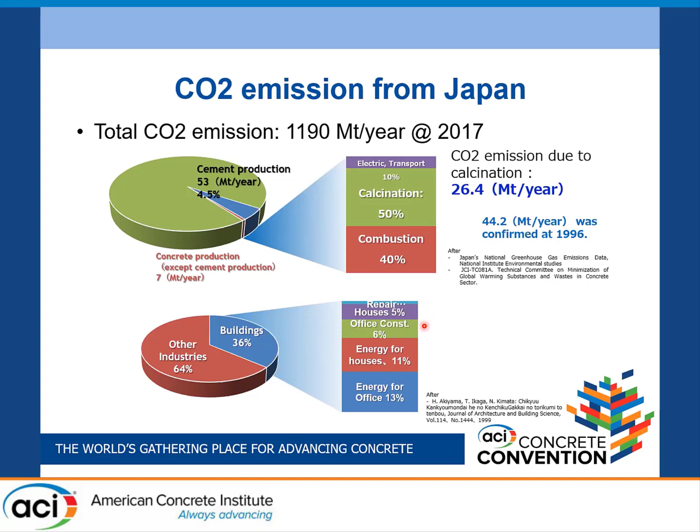And industries relating the buildings produced about 36% of the total CO2. And this is the detail of this number. And the 11% of the total CO2 came from the construction process. So as it is generally recognized that the running energy has a large impact on CO2 emission rather than the construction process, but still this number cannot be ignored. So we have to think about the CO2 reduction in a construction process.

With regard to environmental load, 1,590 megaton per year was consumed in 2017, and the construction sector consumed about 42% of the total resources. So when we look at the more detailed numbers shown here, we can see that the concrete sector consumed about 12% of the total resources, which is about 200 megaton per year, and this number is almost double of the steel consumption.

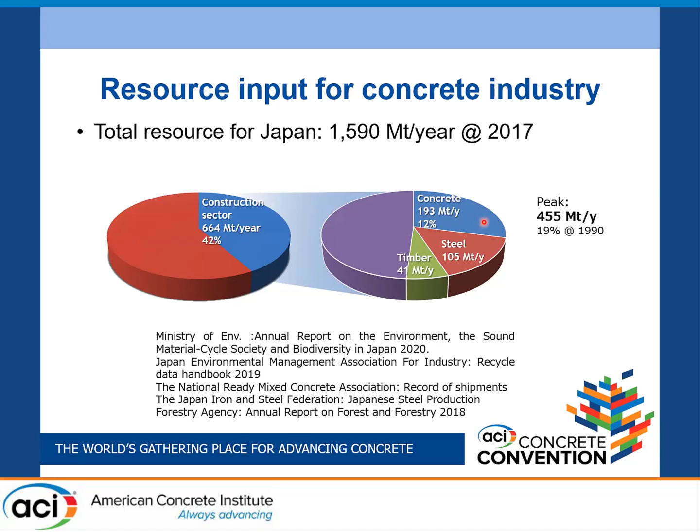So then, I would like to introduce the history of social consensus toward carbon neutral society in Japan. Architectural Institute of Japan and other four professional institutions published the Vision 2050: building related measures to counteract global warming towards carbon neutralization

in 2009. And in this vision, they decided to promote the minimization of CO2 from buildings during the next 10 to 20 years through the carbon neutralization of new construction, and promote the carbon neutralization of all building related sectors, including existing buildings, by the year 2050, and promote carbon neutralization of the surrounding city, region, and society.

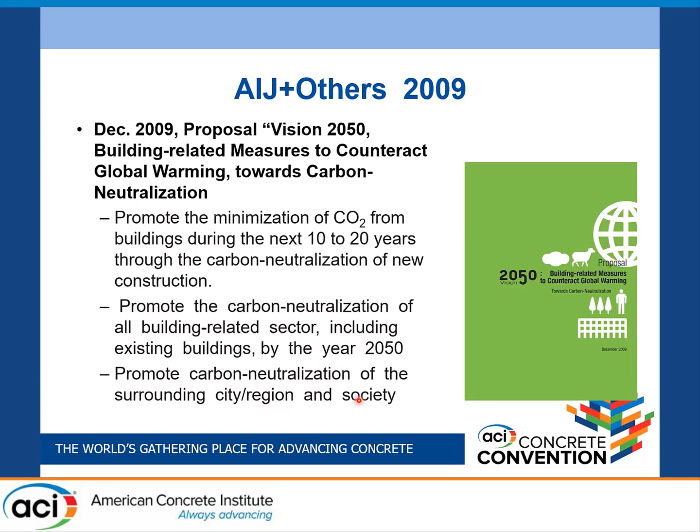And 1 year later, Japan Society of Civil Engineers published the urgent recommendations about the environmental issues. So they recommended 4 implementation measures. They are research and development to reduce CO2 emissions, and inducement measures to balance the environment and the economy. So reduction of CO2 emissions from national land planning and the transportation planning.

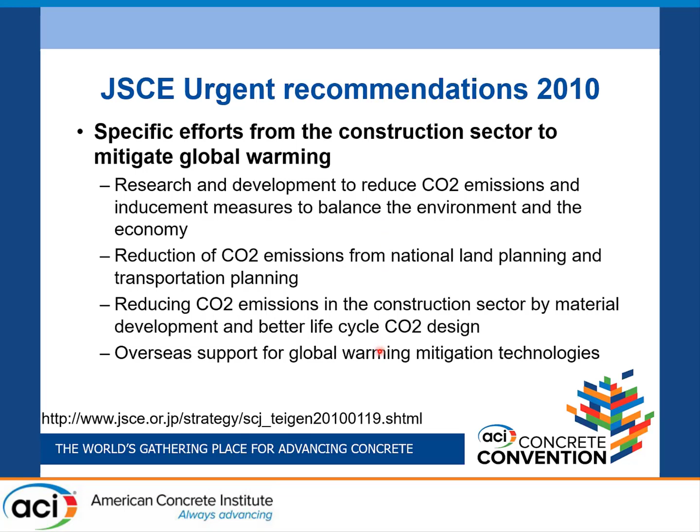Reducing CO2 emissions in the construction sector by material development and better life cycle CO2 design, and overseas support for global warming mitigation technologies.

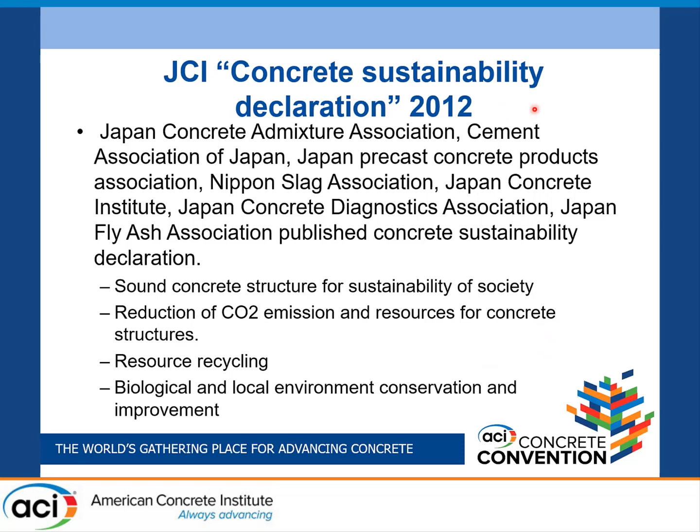Japan Concrete Institute and other concrete-related institutions published the Concrete Sustainability Declaration in 2012. In this declaration, 4 actions are proposed, and they declare to promote sound concrete structures for sustainability of society and the reduction of CO2 emission and resources for concrete structures, resource recycling, and biological and local environment conservation and improvement. It should be noted that this declaration is after the Fukushima Daiichi accident and the Tohoku large earthquake.

And for this background, we change our society bit by bit by applying laws and new systems. So I would like to introduce major decisions of our society. First one is the Low Carbon City Promotion Act, which was implemented in 2012. This law is designed to establish a recognition system for low carbon buildings that contribute to the reduction of CO2 in cities, and to give preferential treatment to buildings of high performance evaluation through incentives such as tax reductions.

So local government is required to make a low carbon city development plan, and the government gives financial support to the local government which aims for a compact energy efficient city. So for this law, a low carbon building certification system was developed.

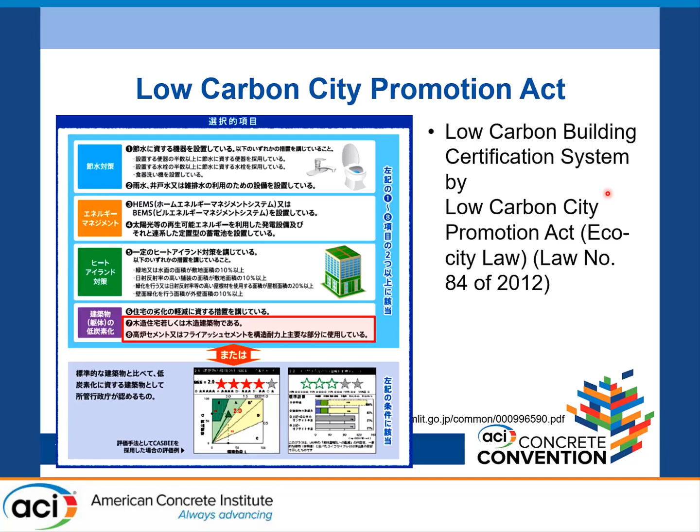Then afterwards, AIJ, the Architectural Institute of Japan, published the AIJ Action Proposal 2015. In this action proposal, from our construction material perspective, these are emphasized: circular use of resources, reduction of resource consumption, conversion to low LCCO2 materials, extending the life of material use and building life, and the utilization of natural materials.

In this carbon neutral roadmap, building carbon neutrality should be attained by 2030 for specific leading buildings. And this action proposal is trying to change all existing buildings into carbon neutral buildings by 2050.

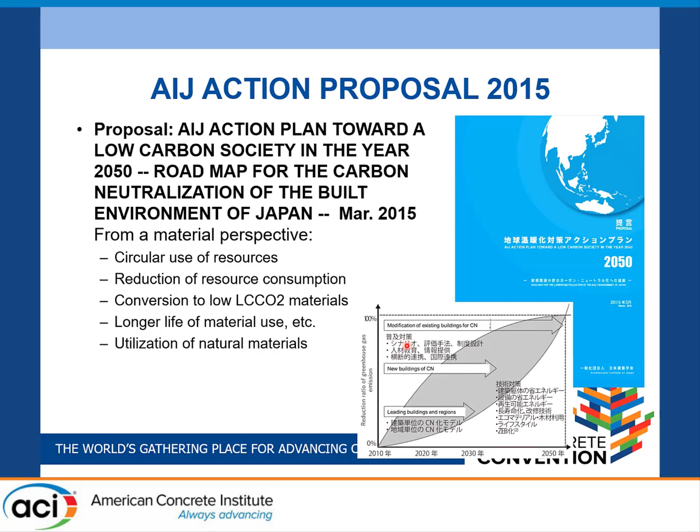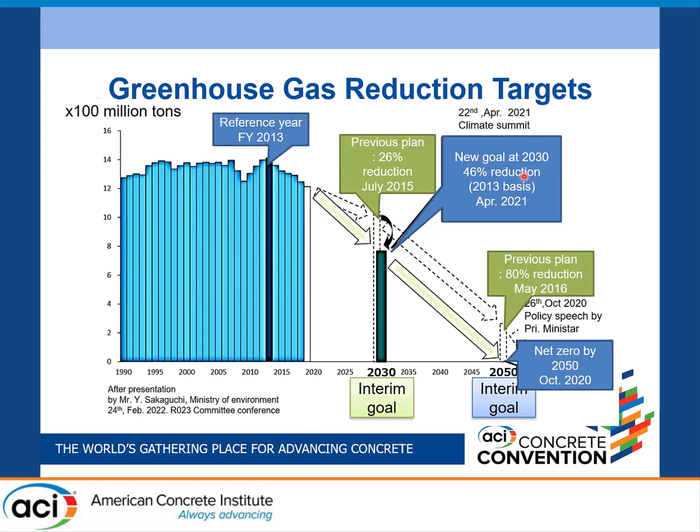This figure shows the historical changes of the greenhouse gas reduction target decided by our government. In general, as time goes on, the target becomes more challenging. Previously, in 2016, an 80% reduction of CO2 by 2050 from a reference year of 2013 was set. Then net zero was decided in October 2020. So now we are moving to a 46% reduction at 2030 from a reference year of 2013.

And the cabinet decision on the 18th of June 2021 was a really big event for us. An action plan of the growth strategy was shown. In chapter 3, section 3, item 4, there is a reference to the material industry and the industry relating to carbon recycling. In this part, I pick up the words directly.

Carbon recycling is a technology that effectively utilizes CO2 as a resource and is an important cross-cutting field for the realization of a carbon neutral society. Japan has a competitive edge and aims to develop this technology globally after reducing costs and promoting social implementation.

There is also some reference to concrete. Specifically, CO2 absorbing concrete is targeted to be available at the same price as existing concrete by 2030 through increased demand, and new products with anti-corrosion performance reinforcements, or building systems which are not affected by such problems, are targeted to be developed to be available for building applications by 2050.

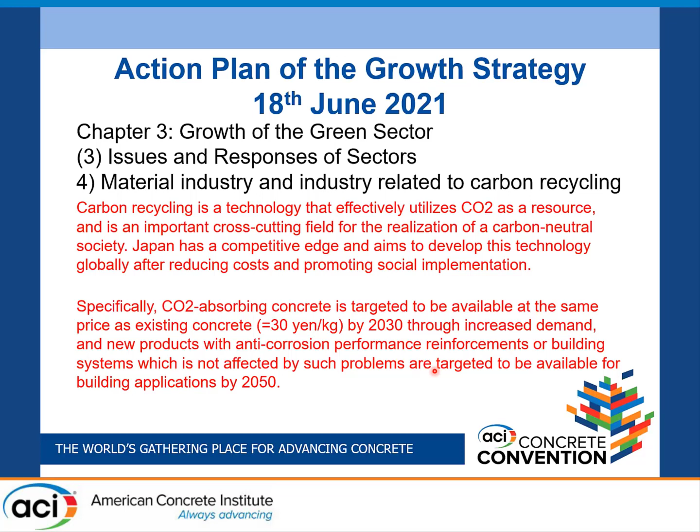At the same time, the green growth strategy through achieving carbon neutrality in 2050 was formulated by the Ministry of Economy, Trade and Industry on the same day. This strategy covers all industrial fields, and of course, the concrete sector is also mentioned. Actually, this is a key action of our government, which changes our society dramatically.

In this strategy, the government says that by using the chance of public procurement, CO2 absorbing concrete and similar materials will be emphasized to create demand and reduce prices. They also back up such development by utilizing the Osaka Expo, which will be held in 2025, to demonstrate the performance of CO2 absorbing concrete and accelerate the performance improvement of such materials.

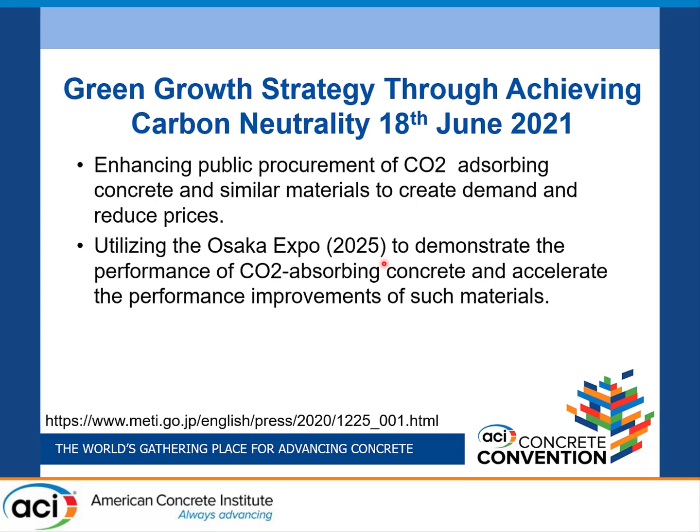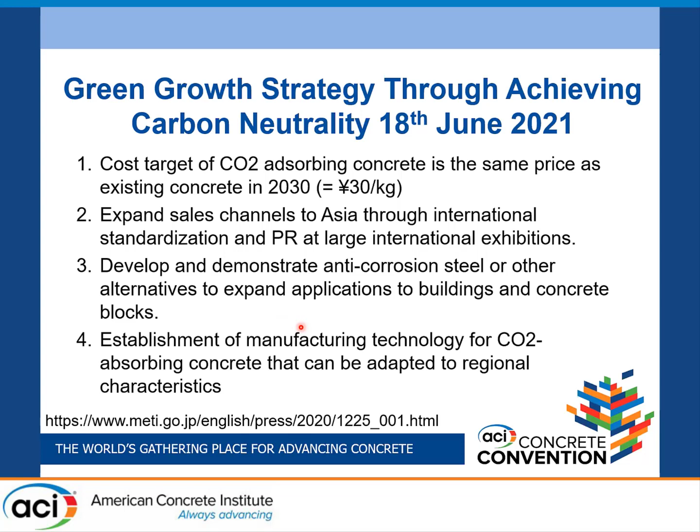This is the execution plan in the strategy where the following targets and goals are introduced. As I mentioned, the cost target of CO2 absorbing concrete is the same price as existing concrete in 2030; expand the sales channels to Asia through international standardization and PR at large international exhibitions; develop and demonstrate anti-corrosion steel or other alternatives to expand application to buildings and concrete blocks; and establish manufacturing technology for CO2 absorbing concrete that can be adapted to regional characteristics. Those are mentioned in the strategy.

This figure shows the schematics of concrete life relating to calcium and CO2. In clinker production, calcination is concerned, so CO2 minimization and CO2 capturing technology are quite important here. The clinker is ground to make cement, and by using other materials, we make concrete. From the mixing process, we can apply CO2 fixation. It is a quite big challenge to maximize CO2 fixation without deteriorating the properties of concrete.

At the end of the concrete structure life, we also have to think about the demolition and crushing process. As you know, after crushing, due to the increase in surface area, large CO2 fixation occurs in this period. And for reusing these kinds of materials, recycled aggregate is also a very important research target. So the expansion of application of these materials is also very important.

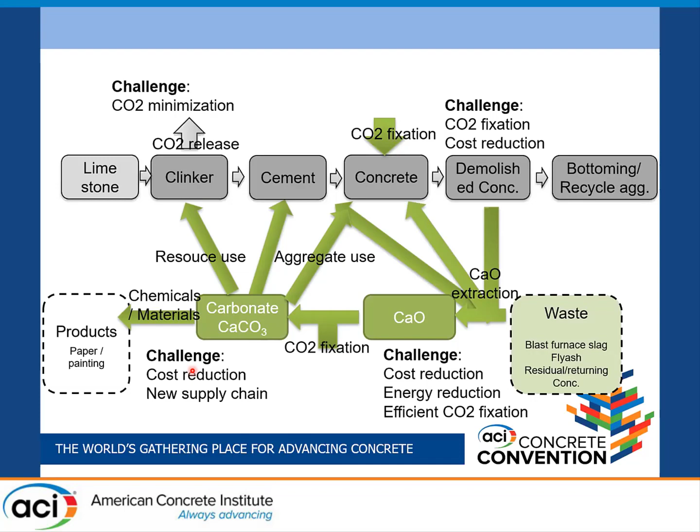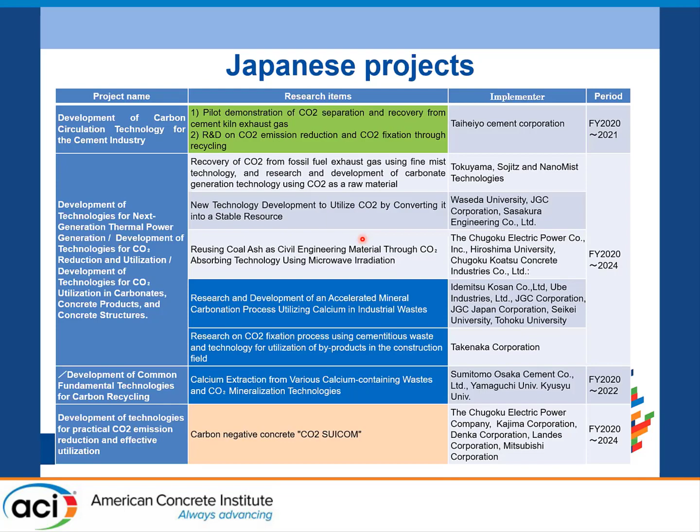They started last year or this year. So many big national projects are running at this moment.

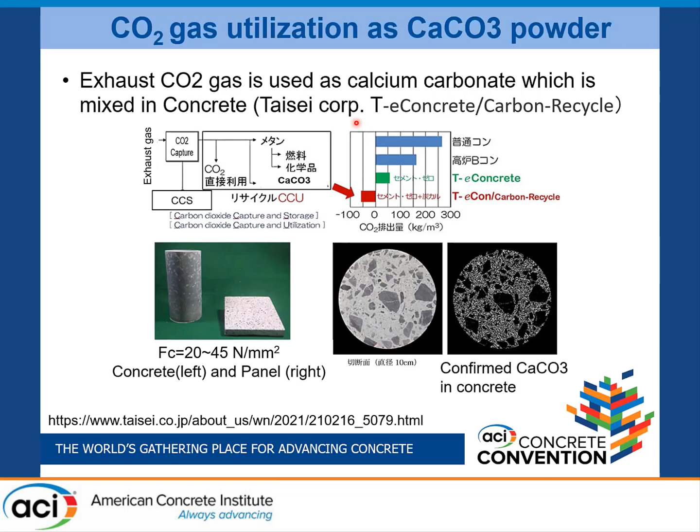I would like to introduce some examples of concrete which can capture CO2 inside. This is an example called T-eConcrete, developed by Taisei Corporation. Its target is exhaust CO2 gas from industry. They capture this kind of CO2 as calcium carbonate and make fines and aggregate that can be used in concrete.

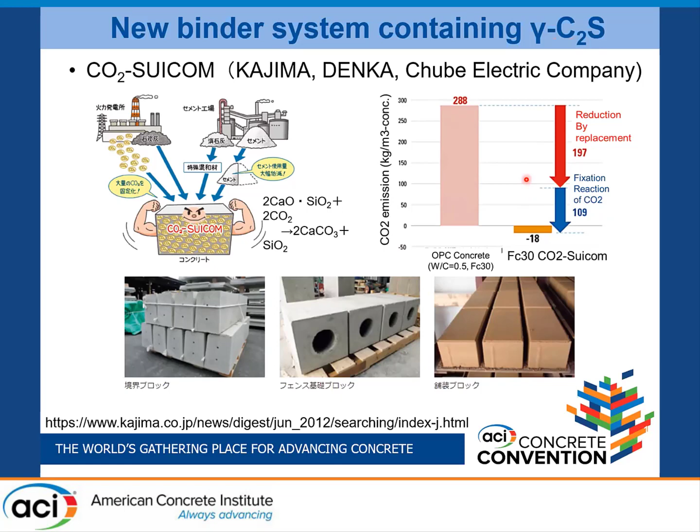They can also react with CO2 under general temperature and capture the CO2. So it is possible to attain carbon negative from ordinary concrete. These two concrete types are quite close to real application. This next one is more fundamental.

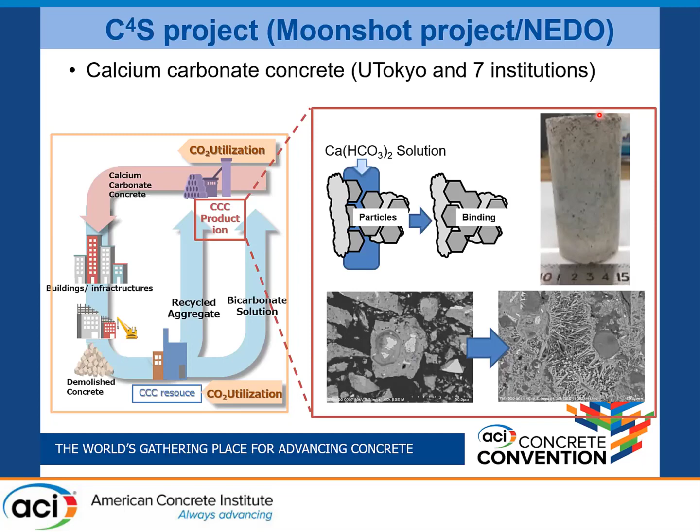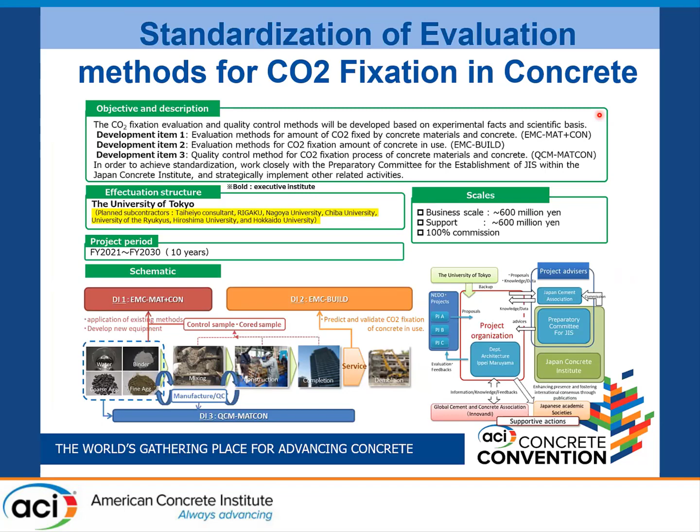Let's summarize and conclude my presentation. Calcium is a key material for construction because we extract it by producing CO2 from limestone, and this calcium is quite efficient since it is easy to make low density hydrates, which can contribute very much to the development of concrete strength. So we have to think about the circular calcium system in the concrete sector.

The Japan government encourages development and implementation of this kind of technique into the concrete sector of both domestic and overseas societies. A large number of trials have launched and started in Japan, and knowledge exchange and collaboration between ACI and JCI could contribute to a better future.